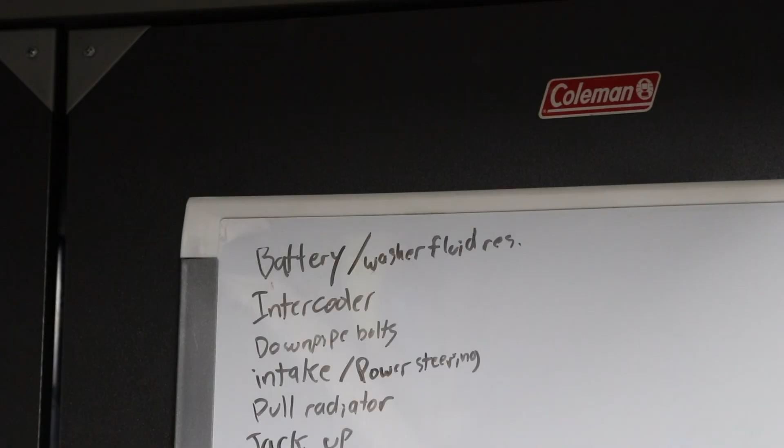So on today's episode, I'm going to be taking the battery out. I'm going to pull the washer fluid reservoir, pull the intercooler and some of the downpipe bolts. I'm also going to pull the power steering reservoir off. I'm going to pull the intake out. And if I'm feeling really crazy, I'm actually going to try to pull the radiator. It depends how I'm feeling here in a little bit.

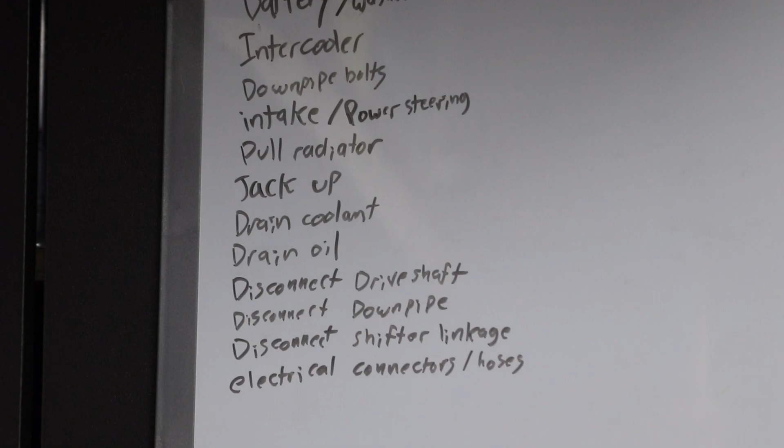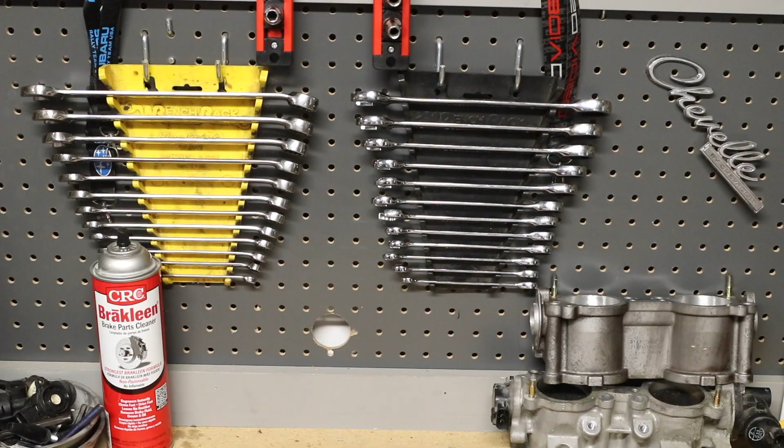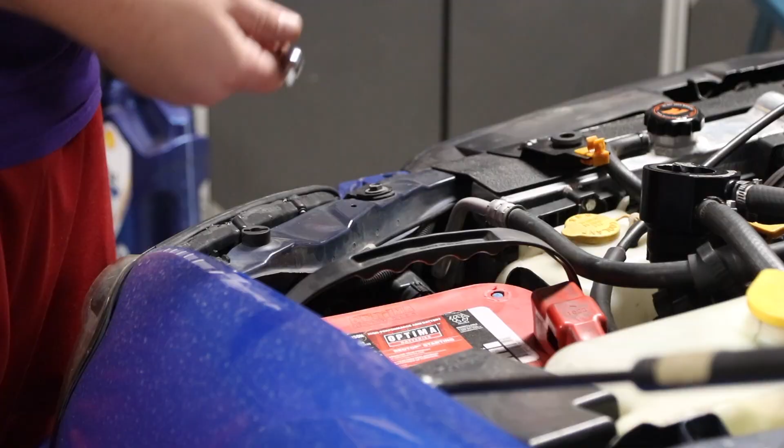This normally would take me less than an hour, but because I'm shooting video too, it's going to take me probably twice as long. So this whole series is going to take me quite a while, but it should be fun. So let's start it. First, I'm going to start off by removing the battery tie down. Easy enough with only a 10mm wrench. Then just loosen the post terminals and it's out.

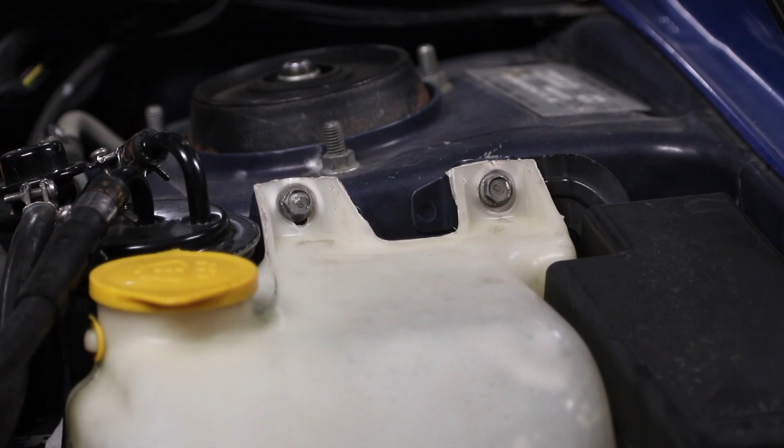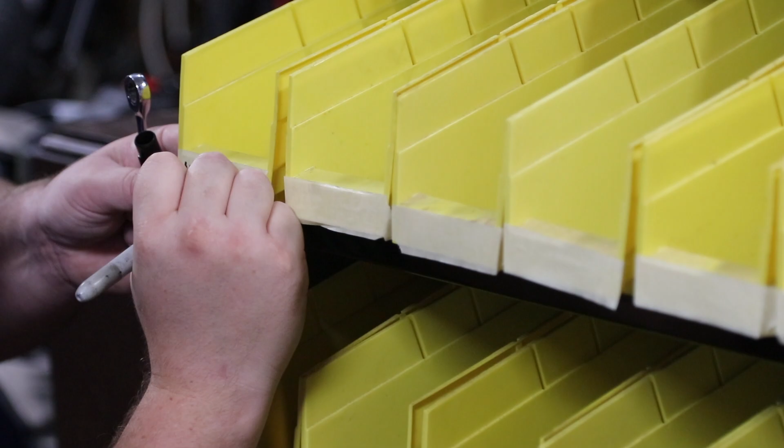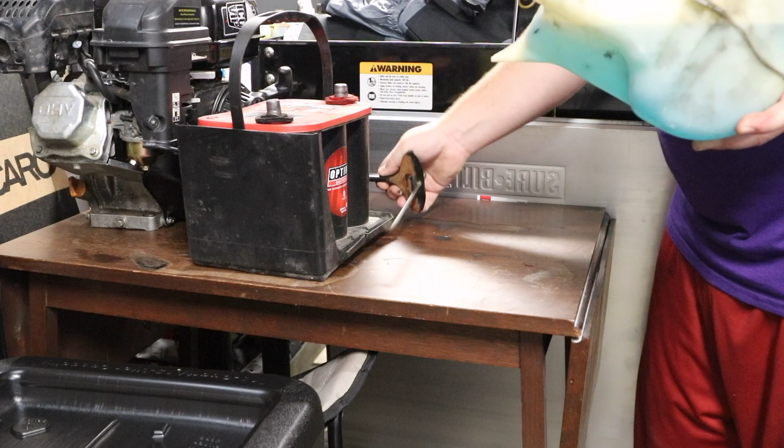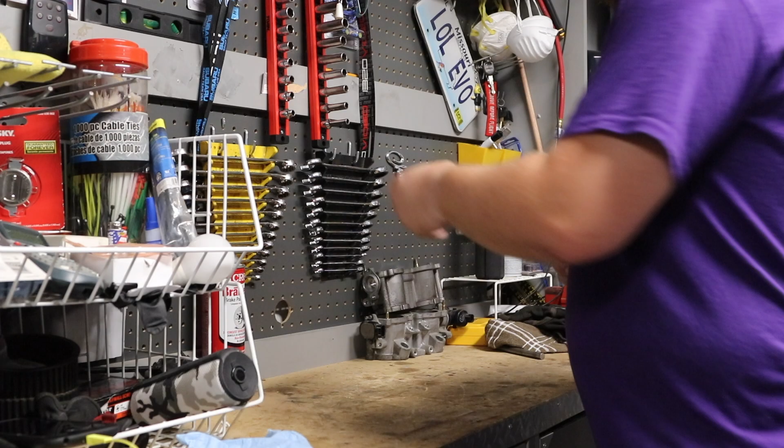Then onto the washer fluid reservoir, also a 10mm. A 12mm socket on a mini electric impact for the intercooler mounting bolts.

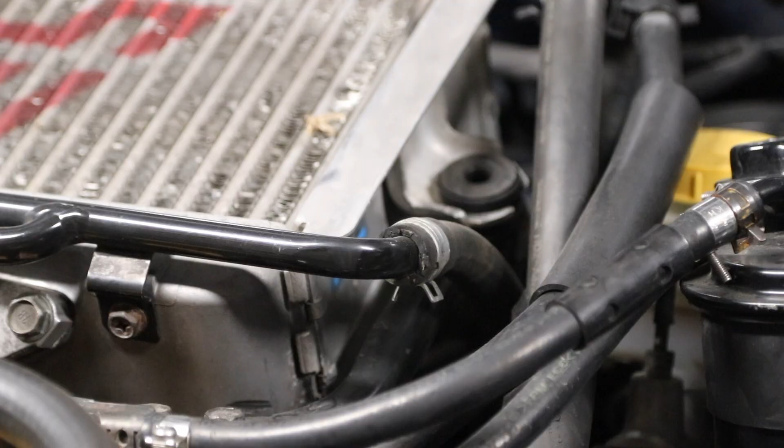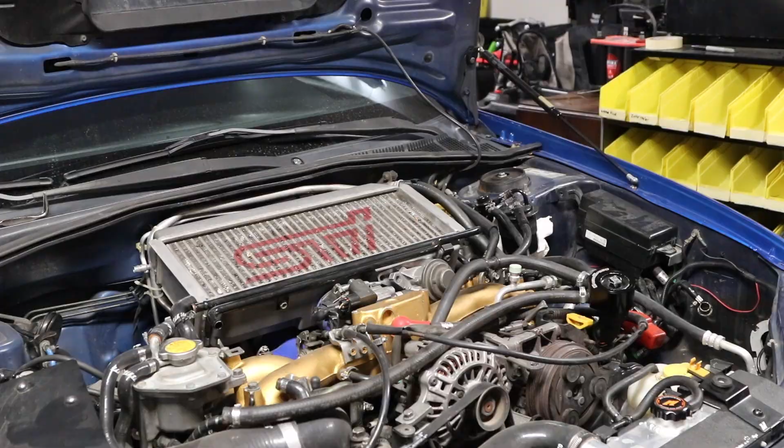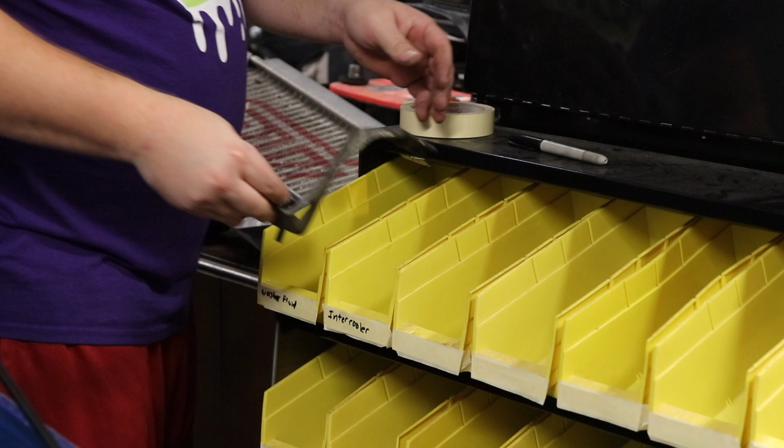Next, remove the breather hoses from the hardline attached to the intercooler. Loosen the turbo intercooler coupler, and bypass valve, and finally the throttle body coupler, and she's out. I'll go ahead and remove the passenger side intercooler bracket now. The turbo heat shield bolts are both 10mm, but you can also use a Phillips screwdriver.

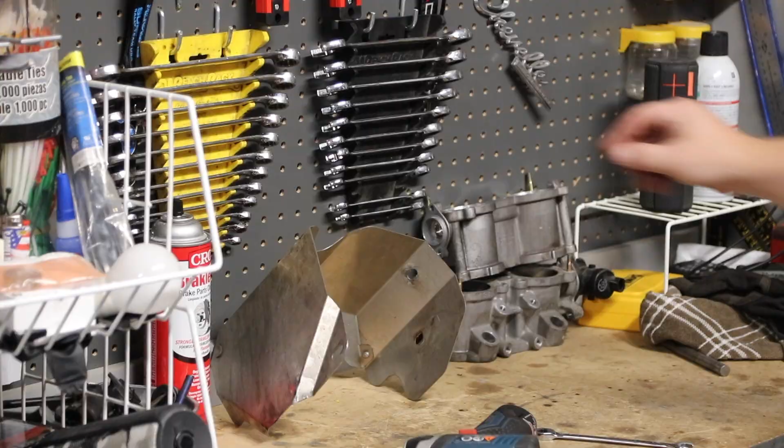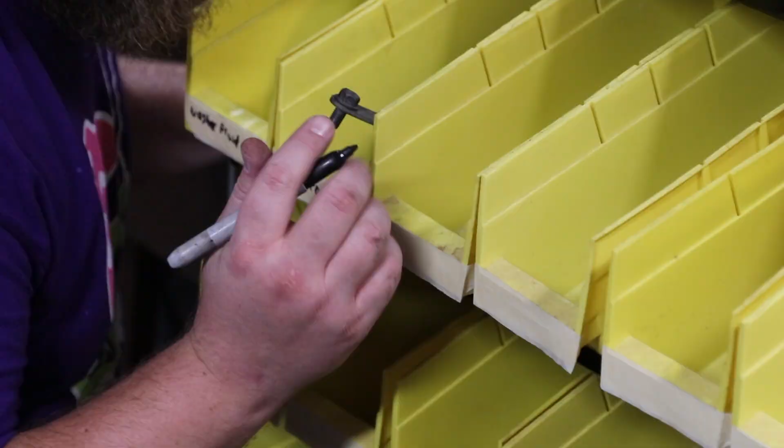A couple 14mm wrenches for the 5 downpipe bolts. There's 2 up top here securing the heat shield bracket. One on this side. Another on this side, and one hiding below that I'll get to later.

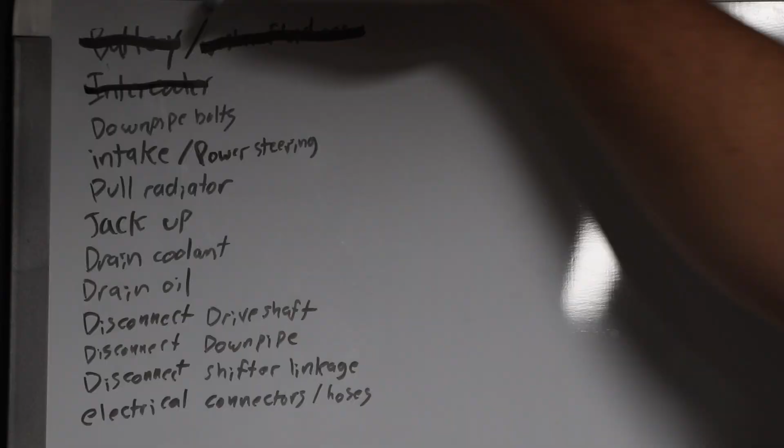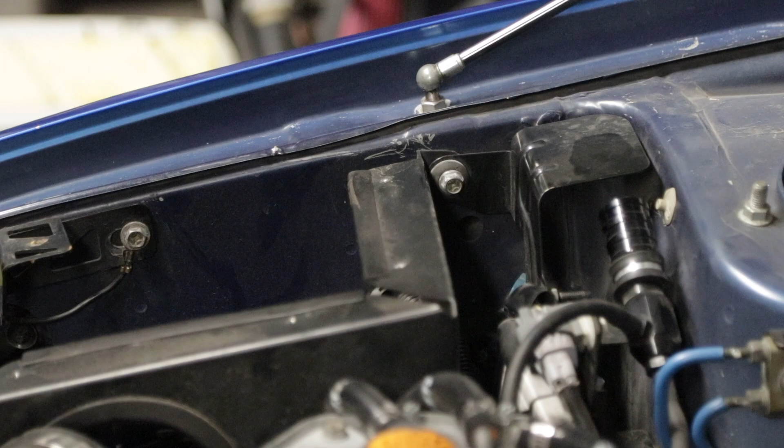Next, I'll remove the Cobb SF intake cover. Unplug the mass airflow sensor, and then loosen the intake coupler to remove the filter. And finally, I'll remove the rest of the intake box.

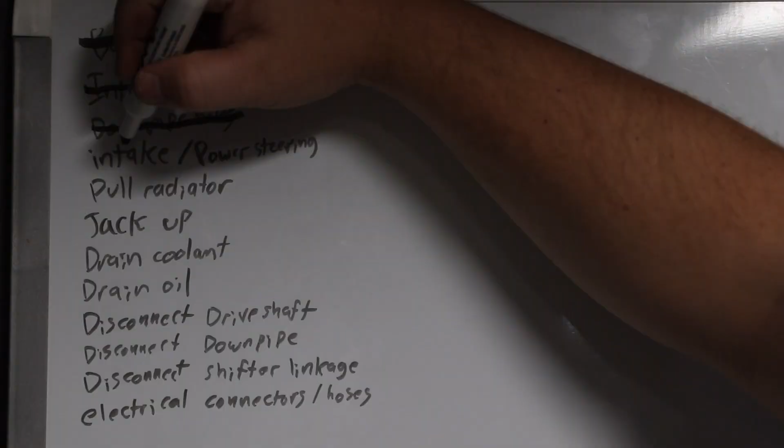Loosen the alternator and power steering tensioner, the other alternator bolt, remove the power cable, undo the plug, remove the serpentine belt, and the alternator.

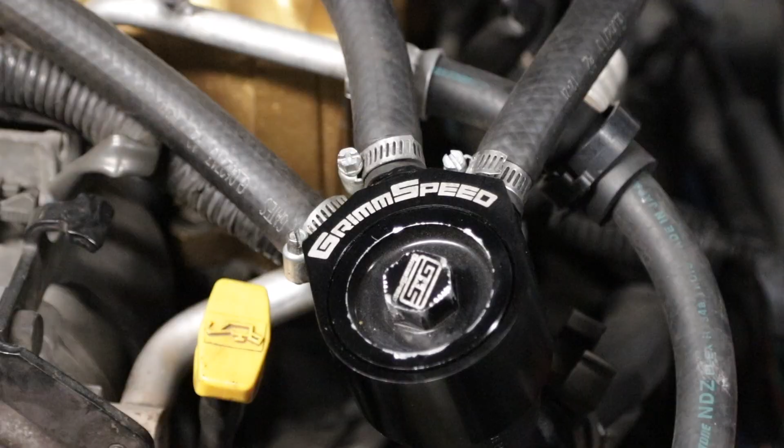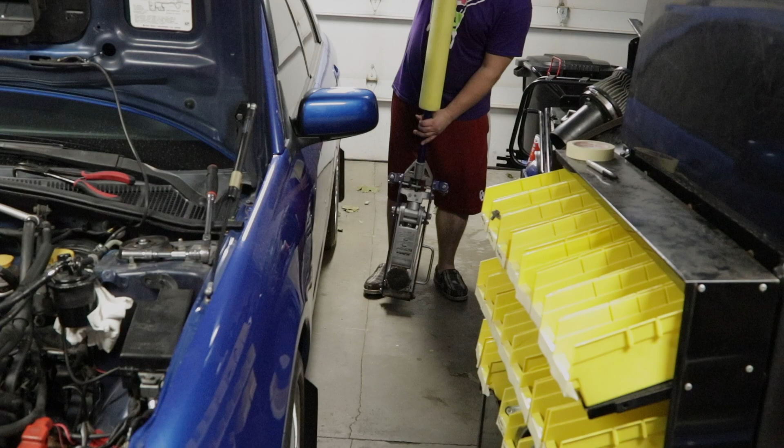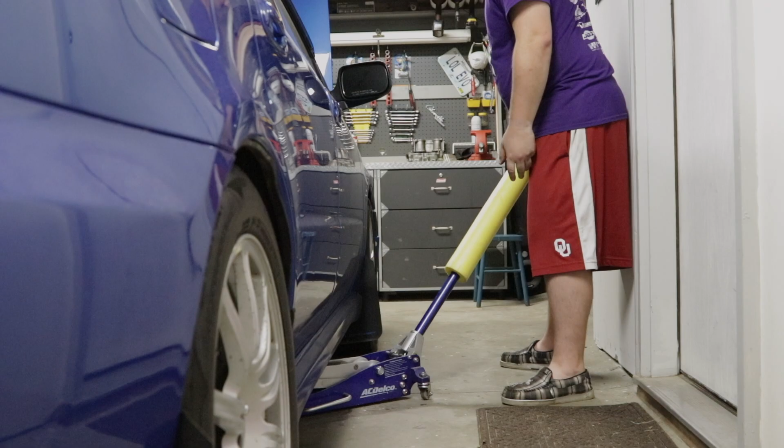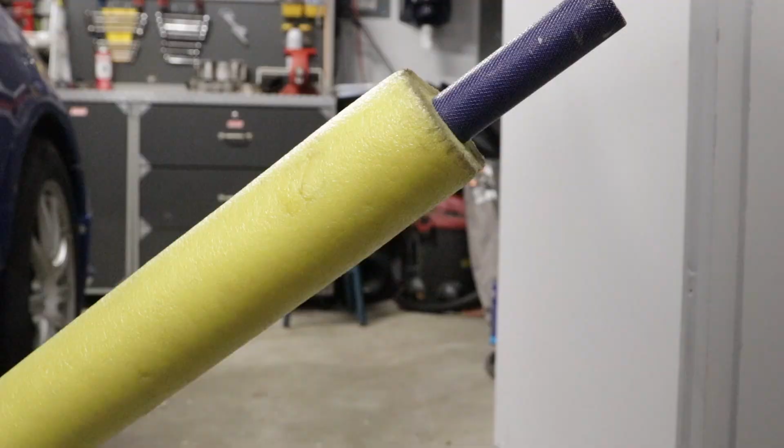I'll go ahead and get this driver's side intercooler bracket out of the way. Now I'm loosening the GrimmSpeed air oil separator and its hoses. And I'm putting the stock cap back on just to be safe. Grab the jack, lift the car up a little bit here. And one thing you absolutely never want to skip is to always use jack stands.

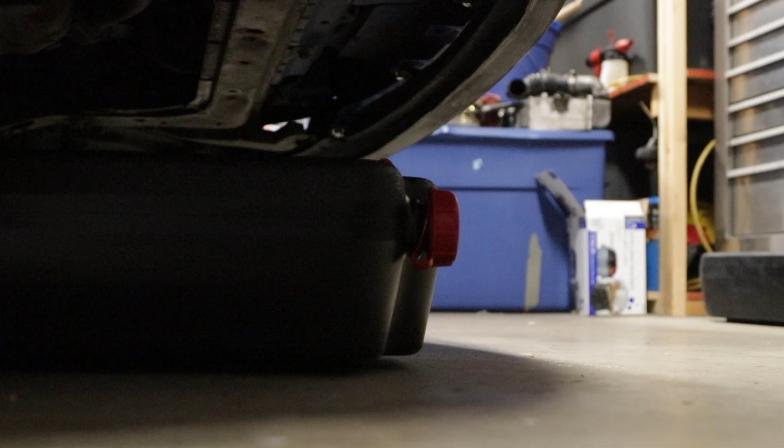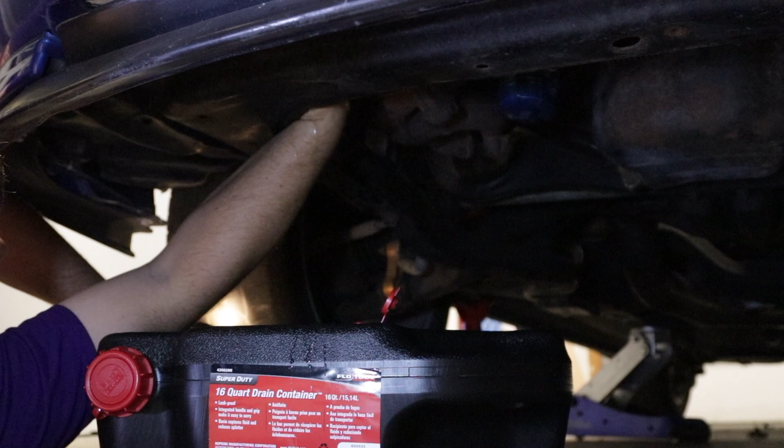Remove the petcock on the side of the radiator to drain the coolant. What the hell? No, no, no!

So as you just saw, I pulled the petcock out of the radiator and fluid went everywhere, and it went along the front subframe and got all over the place. I didn't have a big enough bucket to keep it all contained. So I spent the last 30 minutes or so cleaning up that mess. I dropped the car on the passenger side to level the car out, so that it would drain more out of the radiator and the system.

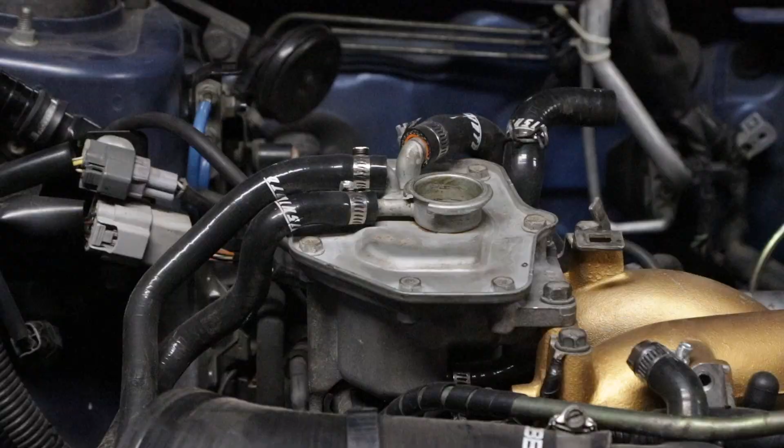So what I'm going to do now is put that petcock back in, and I'm going to pull the overflow reservoir by the turbo, pull that out of the way, and then I'm probably going to pull the radiator even tonight. Let's get back to this. Two 12mm bolts are holding the coolant expansion tank on. Just reminding myself here which hose goes where. And remove the hoses, making sure not to forget the hose underneath.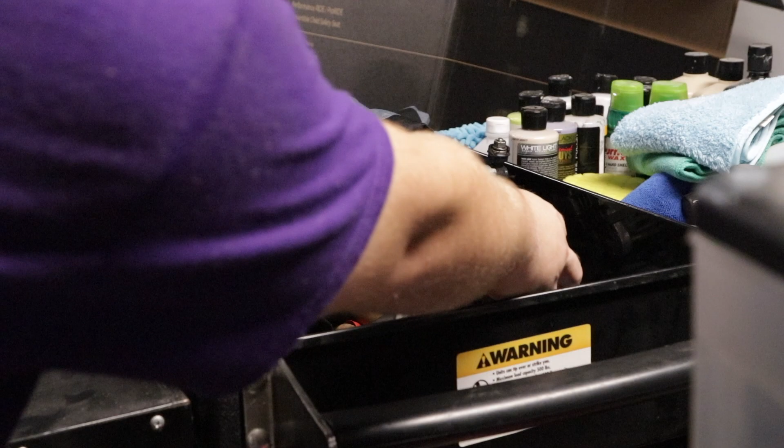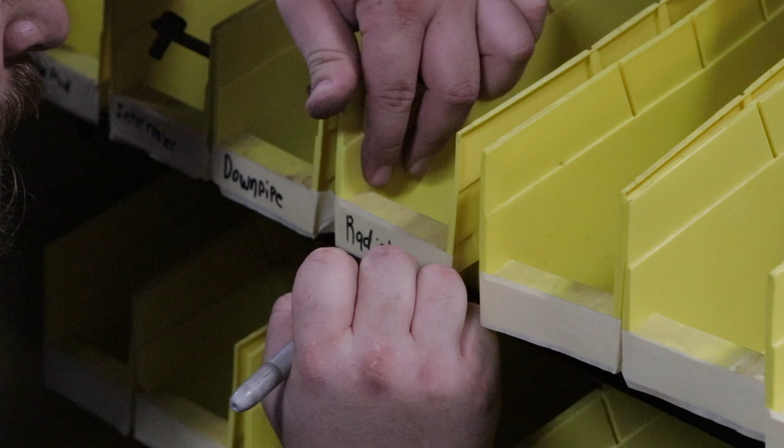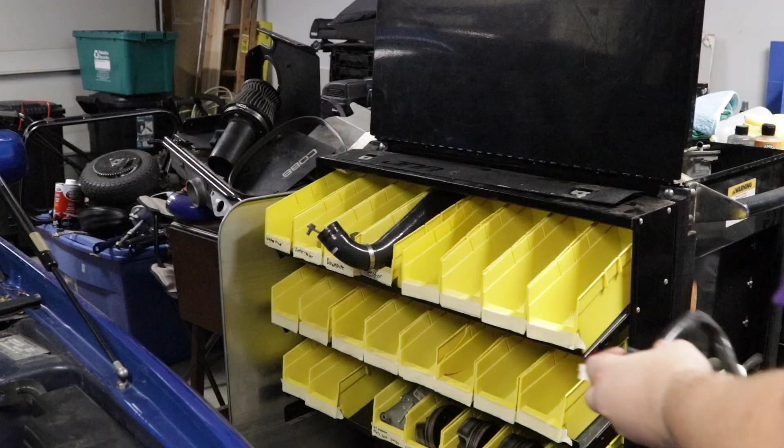Coolant overflow tank. Unbolt the two radiator stays. Don't forget to remove the radiator shroud bolts. Upper radiator hose. And then also the expansion tank hoses. Let's get this pesky throttle cable and cruise control situation out of here. And then finally, the radiator.

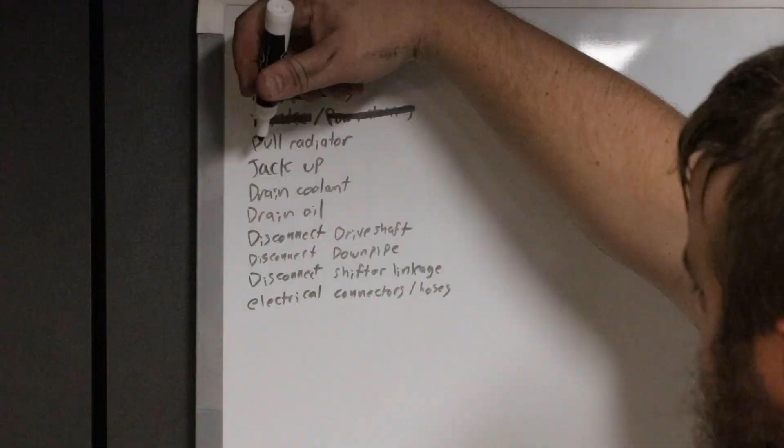So I went ahead and pulled the AC tensioner off. I don't know if it's going back on. I'm pretty sure I'm going to pull all the air conditioning stuff out. Compressor, evaporator, condenser, and all that.

And the reason why I went a little out of my own list order here, I pulled the radiator out of the way just because it's easy, because getting to one of these bolts on the power steering pump is a little bit difficult. So I just made my life 10 times easier. So now we're going to go ahead and pull the power steering pump off. A few bracket bolts, one on top, two in the front.

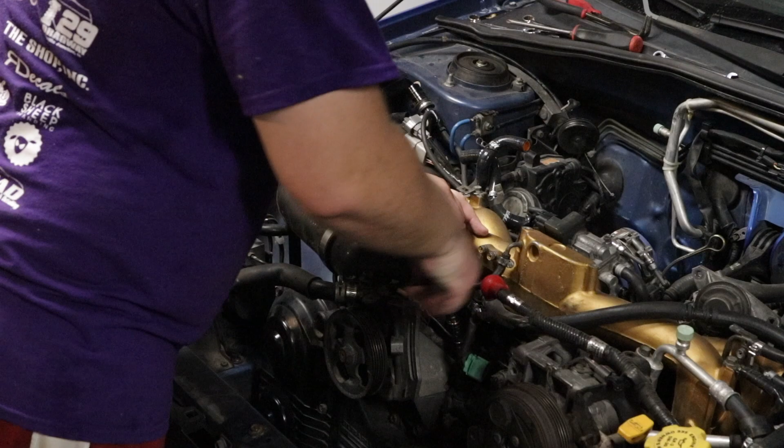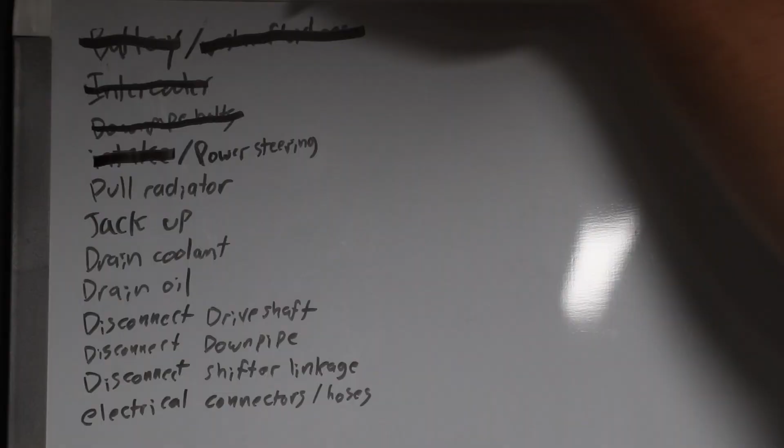And then move it out of the way for now. So to be honest, it's 2:30 in the morning, and I have accomplished everything I planned to accomplish today, but I'm not ready to go upstairs and clean up and go to bed yet, to be honest.

So I'm just going to go through everything up here in the top and just start unplugging stuff, getting it prepped to pull. I'm gonna pull the starter off, and then next video we're going to go underneath the car and disconnect the exhaust, disconnect the drive shaft, disconnect the axles, and we should be ready to pull next video. We're going to pull the motor and trans out, so stay tuned.

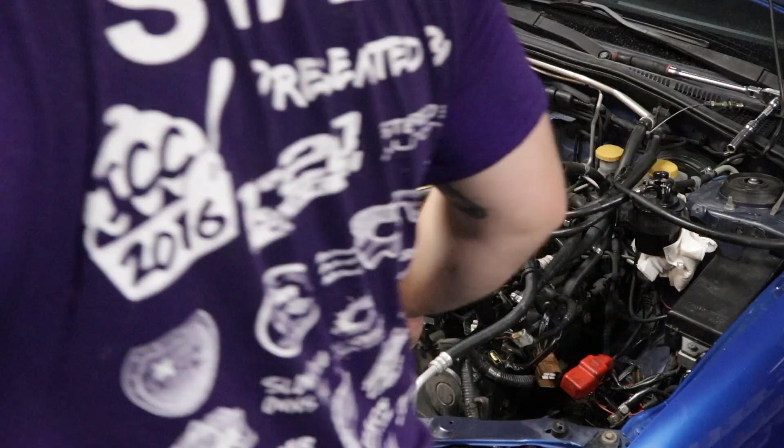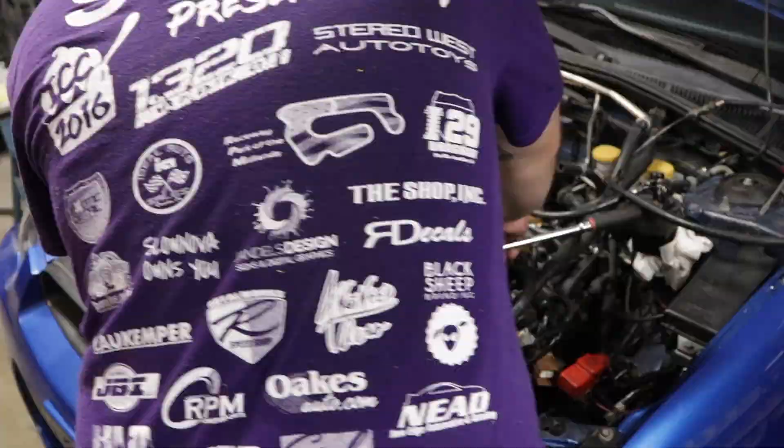Undo the ground on the manifold and unplug the wiring harness. And now for the AC compressor bracket, which, as you can see, gave me a little bit of a hard time until I realized you need to unbolt the compressor from the bracket first. I went ahead and put the bracket bolts back where they go in the block because they're different and I didn't want to mix them up.

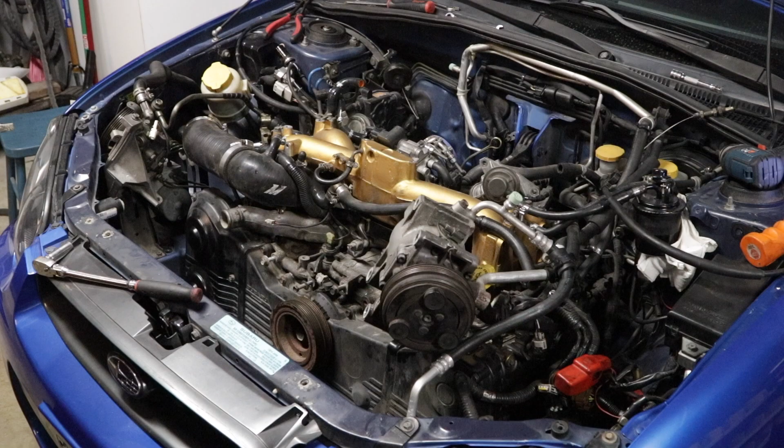Labeling and pulling the fuel feed and return lines. Time to remove the starter. And then finally, the heater core hoses will end my night.

Well, it's a lot later than I want to admit, but that's okay. I got a lot done. I have pulled pretty much literally everything up top that I need to do, and all I literally have left is disconnect the drive shaft and pull it, disconnect the lower part of the downpipe and pull it, loosen the trans mounts, loosen the motor mounts, chain her up. She'll be ready to pull.

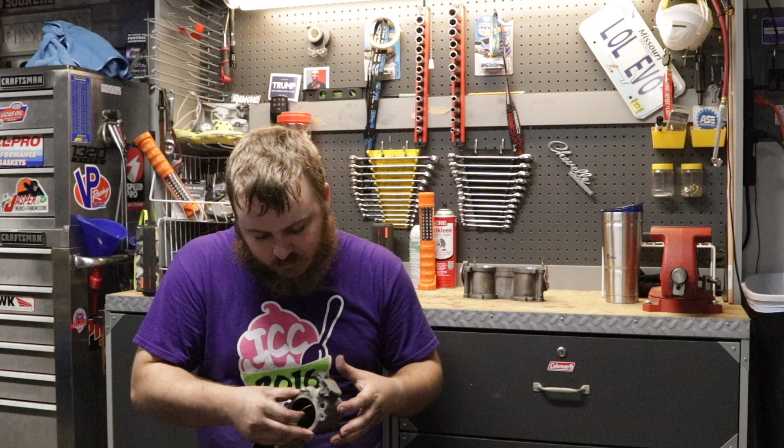have these, these are my stock TGVs. This is what they look like. Stock from factory, there's literally just this tiny little slit right in here for air to pass through, and that's for cold start, idling. And then these open up like this, and they're super restrictive. So what I did is took the factory ones and completely gutted them.

I got one almost completely done. All I have to do is put bolts on each side where the TGV motor used to be, and then that'll seal that off. And then I'm gonna do a video of me deleting the other TGV and porting it and stuff like that. So that'll be kind of cool.

So some of the other things I'm going to do is I'm going to replace whatever bearings I need to replace in the transmission that are howling. I'm going to install a Walbro 255 fuel pump. I've had that sitting around for a couple of years now, ready to go in. That requires no tuning, so I'm just going to throw it in. I need to order a whole bunch of gaskets, some brake fluid.

I actually went ahead and pulled the clutch slave cylinder off. This rubber hose right here I'm replacing with a stainless steel braided hose for the clutch, so that'll feel a little better. Plus I'm going to get some brand new fresh fluid in the whole system there, so that'll be nice. I'm also going to flush the entire brake system. I'm going to order some stainless steel brake lines as well, new injector O-rings, and all the gaskets for the intake manifold. And I'm sure I'll have a lot more to do, but we'll update you when the time comes.